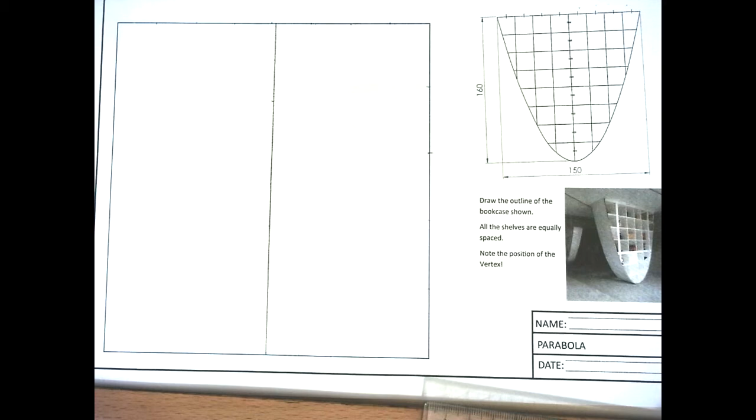Okay, today we're going to have a go at drawing this parabolic bookcase. As you can see, it's a parabolic curve and the vertex is at the bottom. So our vertex is right there. What I've done already is I've drawn the central axis, so you have to find the halfway point. So measuring the base is 150, halfway point is going to be 75.

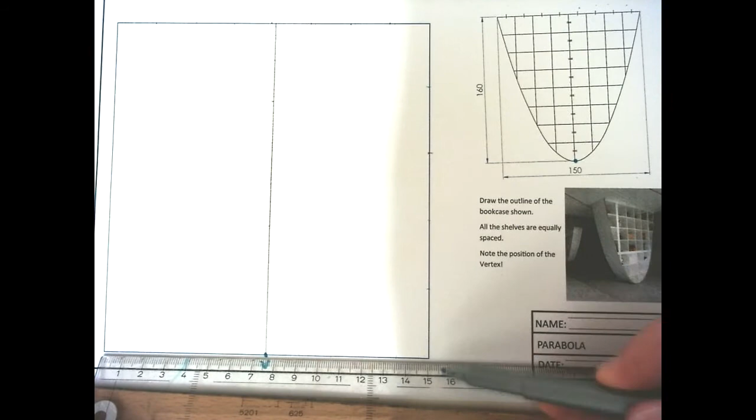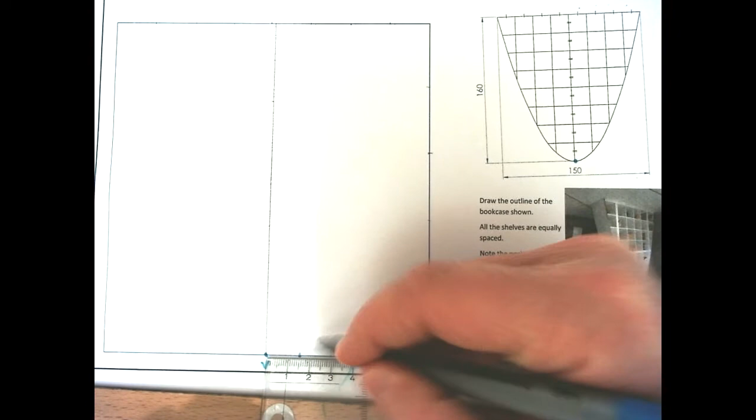Next we're going to draw our curve in two different parts. So we're going to focus on this part and we're going to leave that alone for now. So in this rectangle I want to split this edge into 5 equal parts. So again, it's 75, which means it's going to be 15 and 15 and 15. Also split this into 5 parts, so it's 160 divided by 5, which means each of these will be 32.

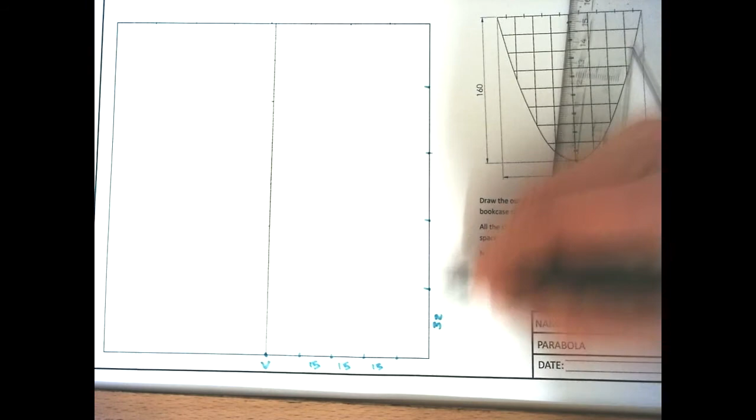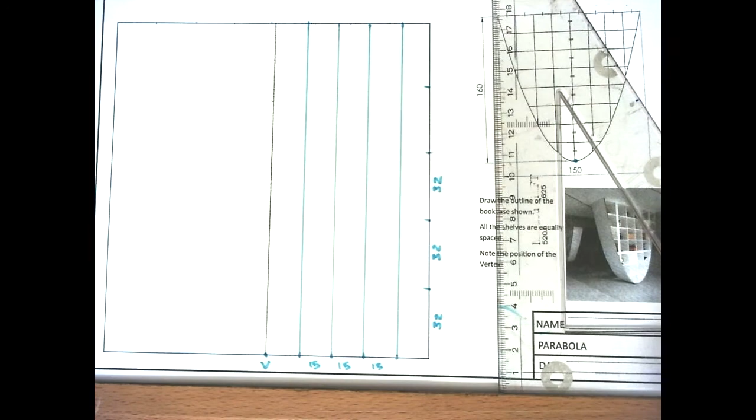There's our axis. So parallel to our axis, we're going to put in these vertical lines. And from the vertex, we join to the side. Now the vertex is at the bottom of this drawing, so our lines look like this.

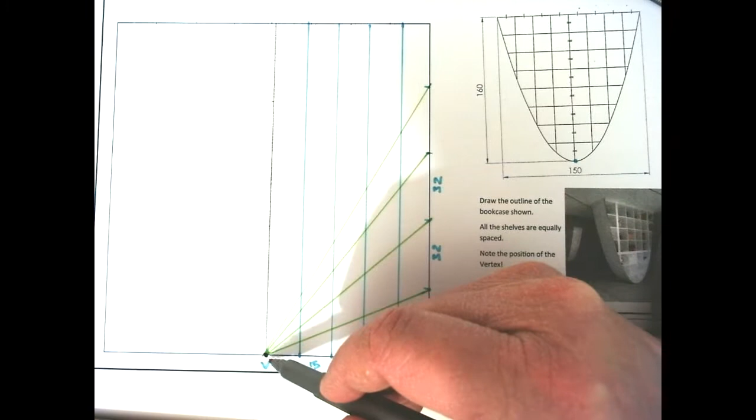To pick out our points, our vertex obviously, then our first set of lines, our second set of lines, our third set of lines, and our fourth set of lines, and finally the top corner. Next we draw our curve. And there we are. There's half of our parabolic curve done.

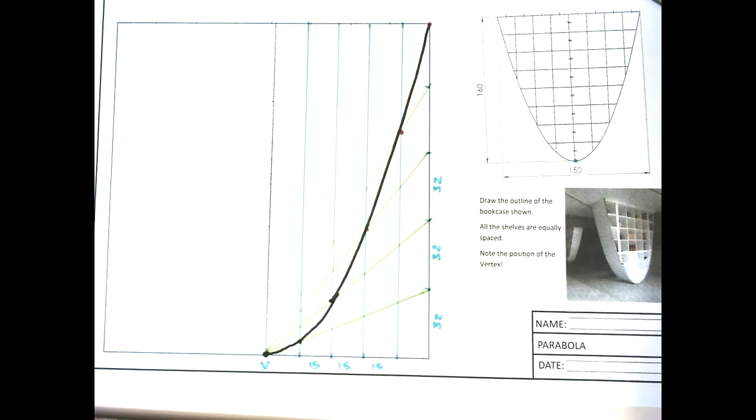So the next thing I'm going to do is to replicate that over here. So again, I'm going to split this into 15mm sections. Parallel to the axis, we're going to draw our vertical coordinate lines. To make it a little bit easier to find, I'm just going to copy these lines straight across.

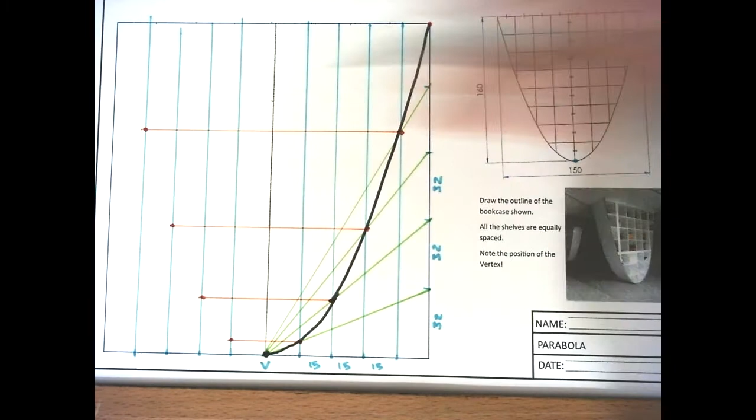So again, we have our points here. And we can draw the curve. There's our parabolic bookcase. Into this we are meant to draw some shelves. So if we look at our drawing, we can see that there's 8 spaces. We can see that each of these spaces is equal.

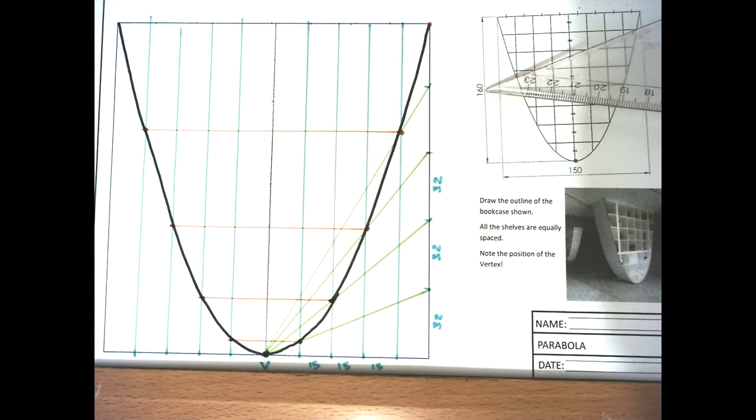So if we do the maths, it's going to be 160 divided by 8, which is going to give us 20. So I'm going to mark off every 20mm. And those are my horizontal shelves.

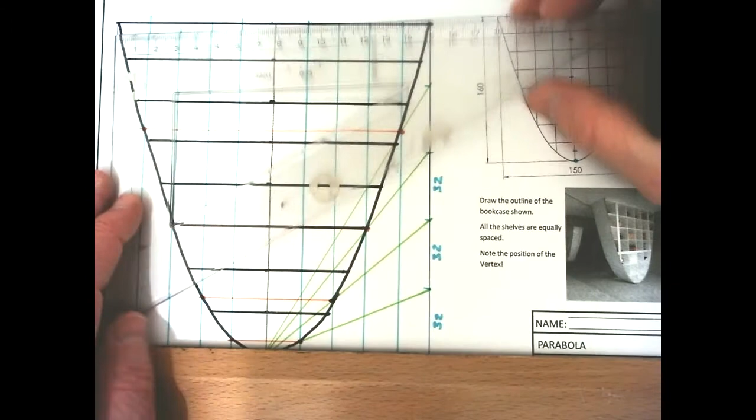Next, we have to put our vertical divisions in. This is a little bit different to the ones we've already used. Okay, so if we look here, you can see there's 8 spaces. It's 150mm long. So if we do the maths, it comes out at 18.75mm. Now that's pretty close to 19.

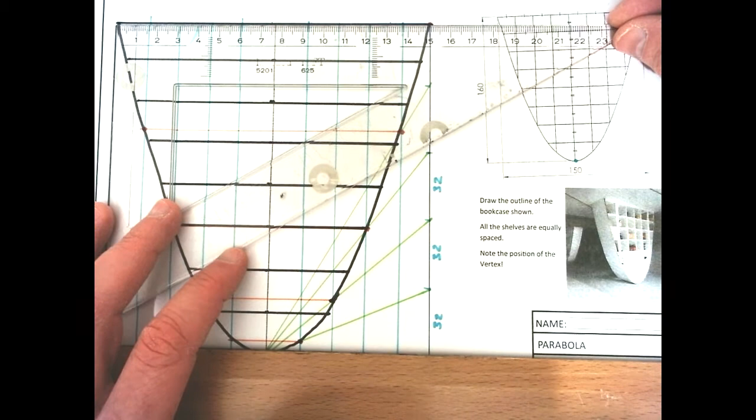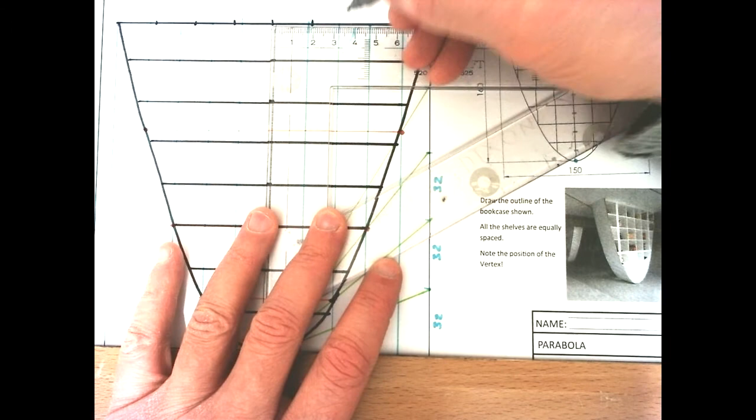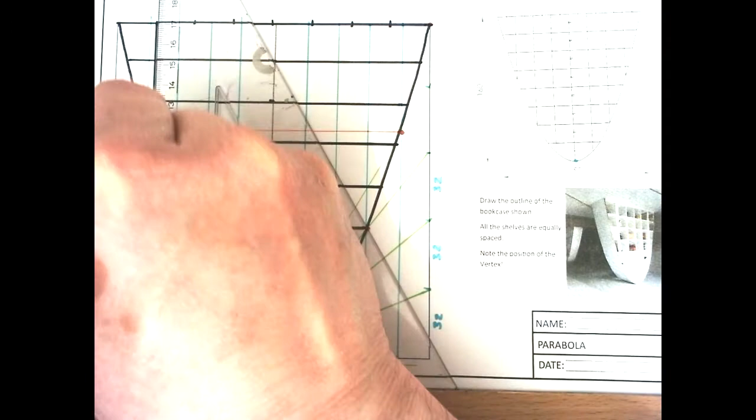So if I give it a go, you're not really going to be able to pick out that accuracy, that 18.75 millimeters. So let's give it a close go at 19 millimeters and let's see what happens. And again, we draw our vertical lines. And there's our shelf unit.